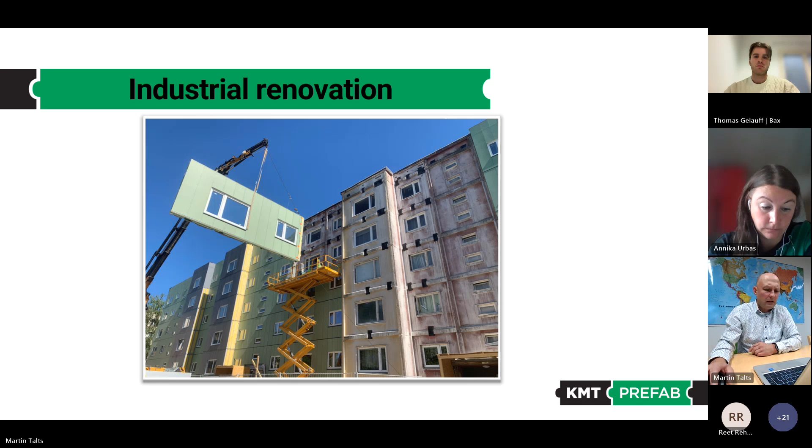About Estonian experience with industrial renovation, it started in 2017 when student accommodation of Tallinn Technical University was renovated with prefabricated wooden elements, in very tight cooperation with scientists from Tallinn Technical University. And after that, one a bit smaller 3-story building close to Tallinn was renovated in a similar way.

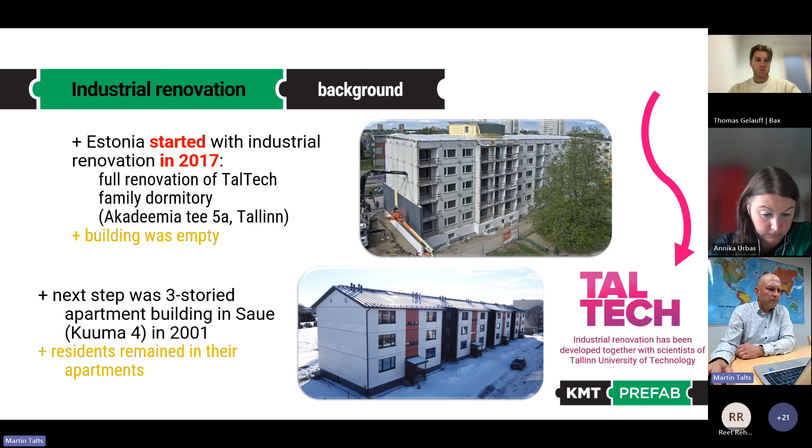And just a second. Yeah. Okay. And then

In 2022, we started in Estonia with a pilot project where 19 Soviet-era apartment buildings were renovated with prefabricated elements, and it was also supported by the EU and Estonian government. And there were chosen 5 different types of the most common apartment buildings. And today, all of them are completely renovated, and we can say that it was definitely a success story. And we learned quite a lot during this process.

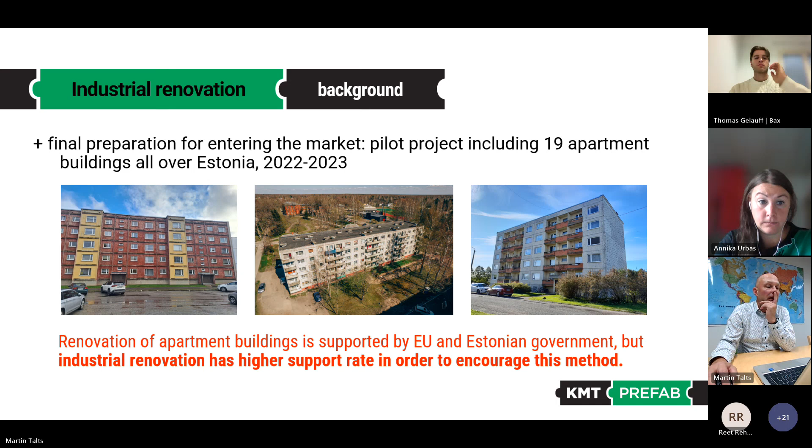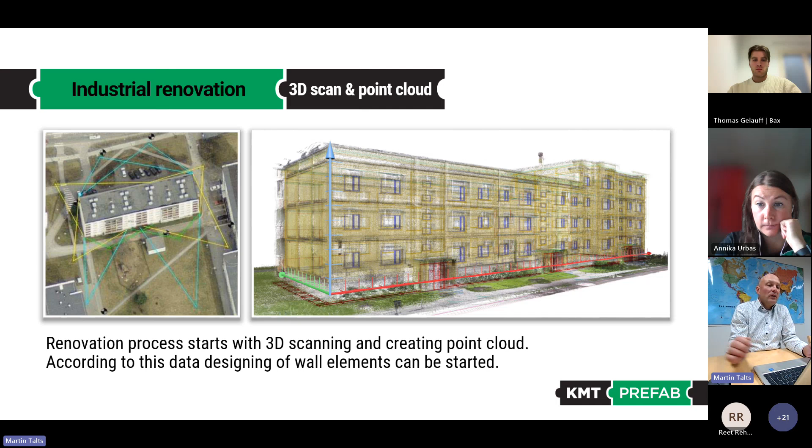Here we can see in more detail how it works. For every single project and house, it starts with laser scanning of the existing building, and a point cloud is created, and according to this data, we can design wall elements. It will then be divided into panels, and with this laser scanning, we can figure out the exact locations of windows.

We quite often face rather bad construction quality of these houses, and the main challenges are actually to find a proper and adequate fixing method and to line up windows, because they're not aligned. It's quite different compared to new buildings.

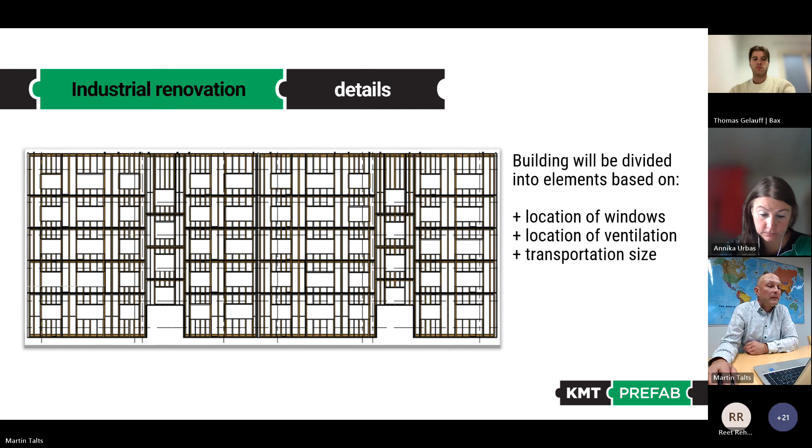For all those 19 houses in Estonia, ventilation pipes were also integrated into the elements. The requirement was that for every house, not only the facade but also ventilation with heat recovery had to be added. Also the roofs were insulated, and also the heating system and staircases as well. And in some of those houses, apartment doors were also replaced.

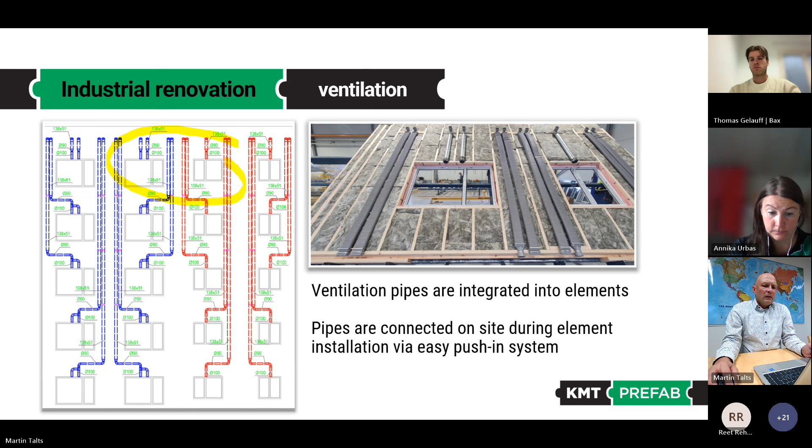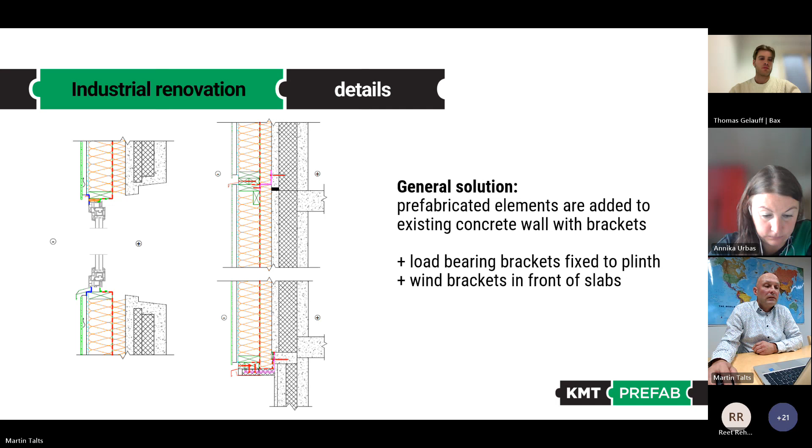So, and of course, the main advantage of every project where prefabricated elements are used is the time we can save during the whole construction process. I would say it's many times faster to insulate the whole envelope of the house with prefabricated elements. It takes only a few weeks to cover one 5-story building with 60 apartments with elements. According to our experience, it takes some 15 to 20 days, and the outside is completely ready.

And of course, using that method, there is no need to move people out of their apartments. It means there is much less disturbance during the process, and no scaffolding is needed.

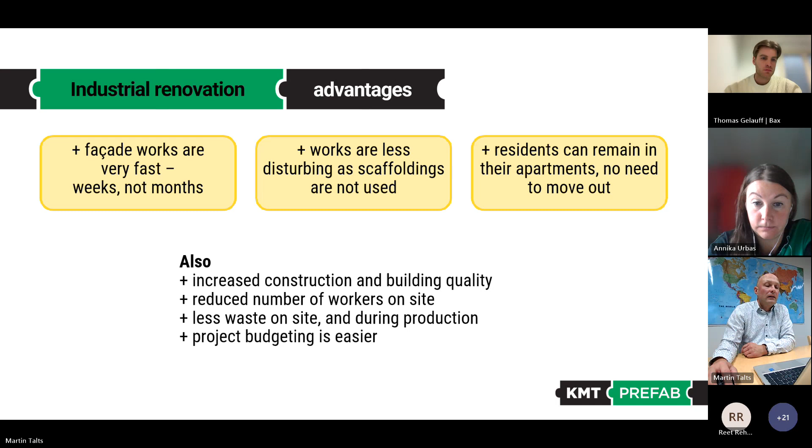And of course, one big advantage is that it's possible to install the elements in almost every weather condition, even in cold winter time. Yeah, actually it took, of course, a bit more than 20 seconds. It took about 20 days, but it's still many times faster than the conventional way.

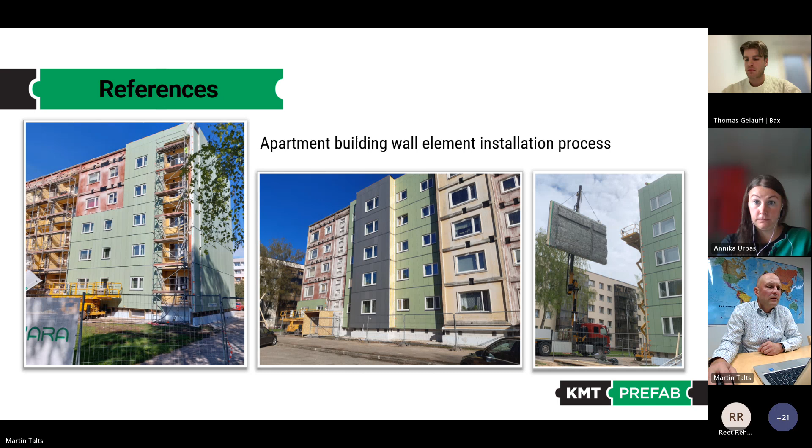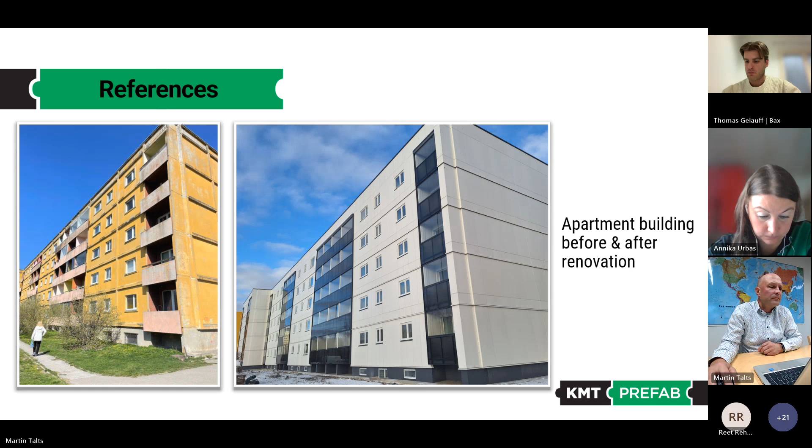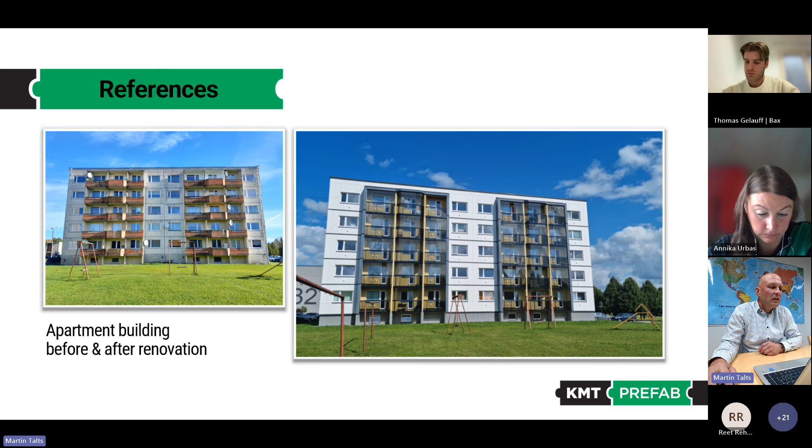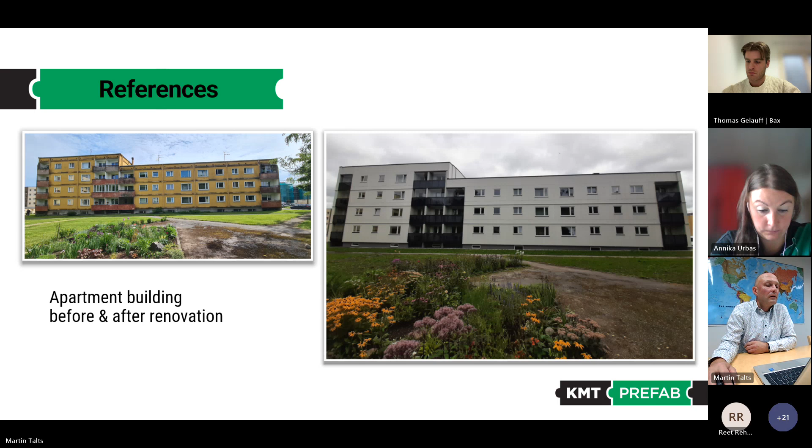And here are some before and after pictures. This is a 30-apartment, 5-story building in Middle Estonia. All the renovation with our products took only about 10 days on that project. There is another typical apartment building in South Estonia, close to Tartu.

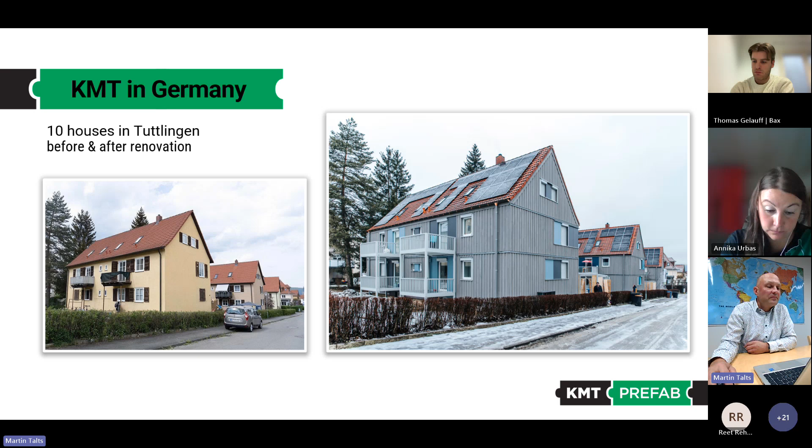And here are some of our references in southern Germany, in Tuttlingen, where we renovated 10 smaller apartment houses last year. Yeah, that was it actually from my side.

And to summarize, I would say that prefabricated or industrial renovation is actually the only way to achieve our climate goals. Because if we continued in the traditional way with scaffoldings and doing everything on site, it would take more than 100 years.

But as we know, we should dramatically reduce our emissions in the next couple of decades, and we just don't have time for using other methods, and we have to be innovative and use industrialized and more standardized methods. Thank you.

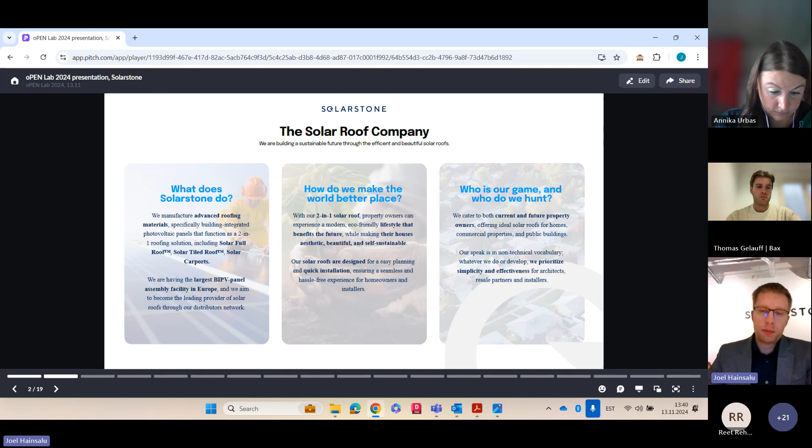How do we make the world a better place? We do it by repurposing existing areas. Whether they're roofs or, in some cases, areas like parking spaces, we can repurpose them and give them more, using already used-up materials or areas. Our main contacts are current and future property owners, and everybody related to the process of building a new house, for example architects, resale partners, installers, roofers, prefab manufacturers, and so on.

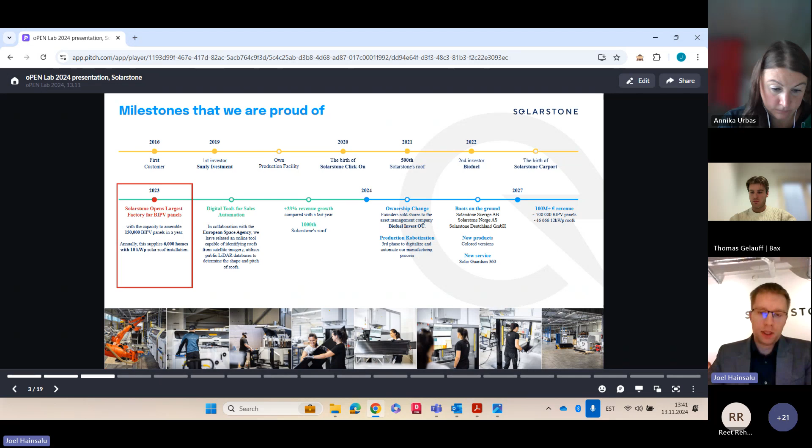All through these years we have done research and development, new products, and also installed solar roofs. In 2021, we had our 500th roof installed. In 2023, we had our thousandth roof. And we intend to grow. Currently we're active in Estonia and also in the Nordics, Sweden and Norway as well. And now we are also planning to expand into Central Europe.

So what are we fixing? What's the problem for us? We see that the traditional way of installing solar can be more efficient. The traditional way is a bit unattractive. It undermines the architectural design of the house. It has an increased environmental footprint, meaning we have several layers on the roof. It could also mean increased project management workload, because several different contractors work on site, and everybody knows that this could be a headache. It can also damage the current roofing material and add significant weight to the building construction.

And what is our solution? Adding the panel straight to the battens. Skip the middle part, so that we have aesthetic looks and fewer sections where damage could happen. So here is the regular solution, right? We have roofing, mounting systems, and rooftop PV panels. Here we skip the roofing material part by having it all 2-in-1.

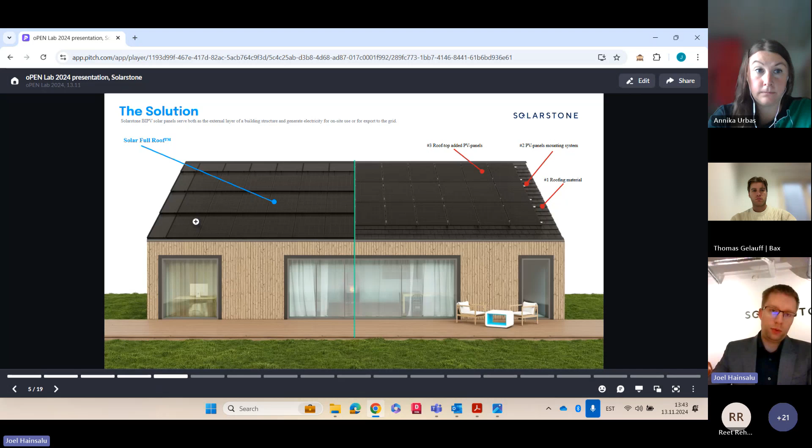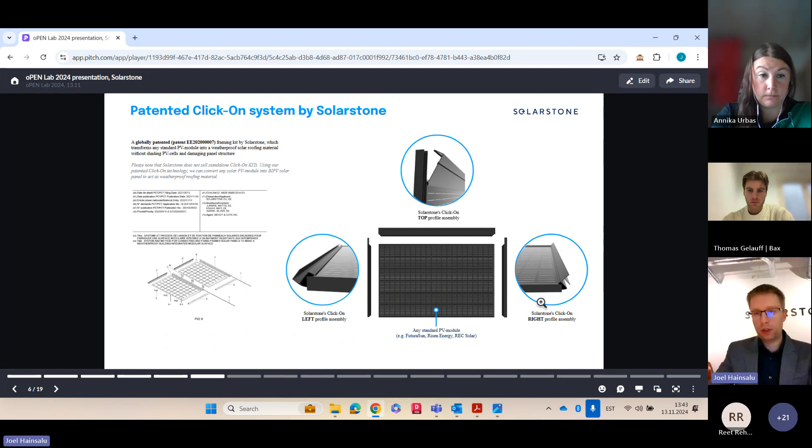How it works is that we take a standard PV module, which can be used anywhere. We make it a roofing material, but the same PV modules can be used on the ground or on a regular rooftop, or like here, as building-applied photovoltaics. We add our patented system, which we call the click-ons, and by that we make it a roofing material. When we have several modules, we can tie them together, and also tie them into the battens.

So here is how it looks in a nutshell. This is a regular section of a roof. We have battens and counter battens, and with clamps and the click-on system, we can tie these panels straight to the battens. They overlap each other, and by that we make it a nice looking roof.

Also, the ventilation is part of the design. When the BIPV industry started, ventilation was a huge question, because when solar panels heat up, they're not as efficient anymore. But by having a ventilation system throughout the side of the roof, we don't have these issues anymore. The panel effectiveness is pretty much as good as it can be, because we're utilizing existing solar panels produced by manufacturers who are best at their job, and we're able to keep them cooled so they can work efficiently.

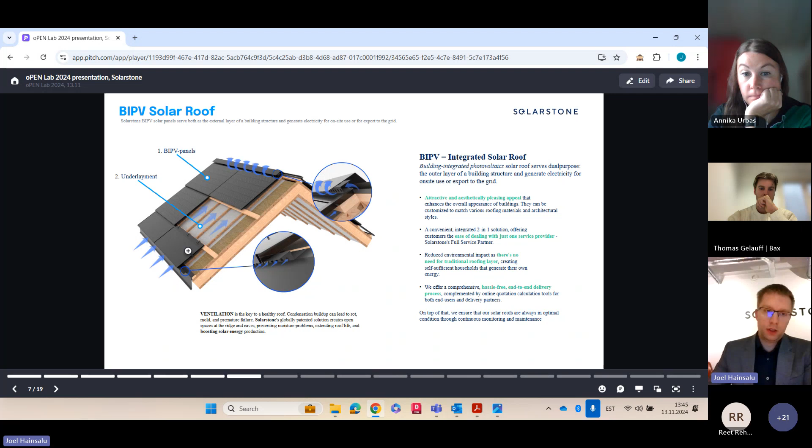This same section works pretty much the same way on a 90-degree angle, meaning it can also be installed vertically, because this is what we did with our Open Lab project last year. On the 10th of February, we went to the KMT Prefab and installed 2 PV panels together with flashings to the test rack or test elements.

This was also to test something. We all know that the panels themselves handle transportation questions really well—some panels start their journey across the globe, but travel safely, palletized and strapped. But now we wanted to test whether we could install these panels to the element already, and then have them transported as part of a structure to the site and installed there. We wanted to see if this extra handling and transportation, maybe in a different way than they're used to, could negatively impact the panel in any way. That was our main question regarding this test.

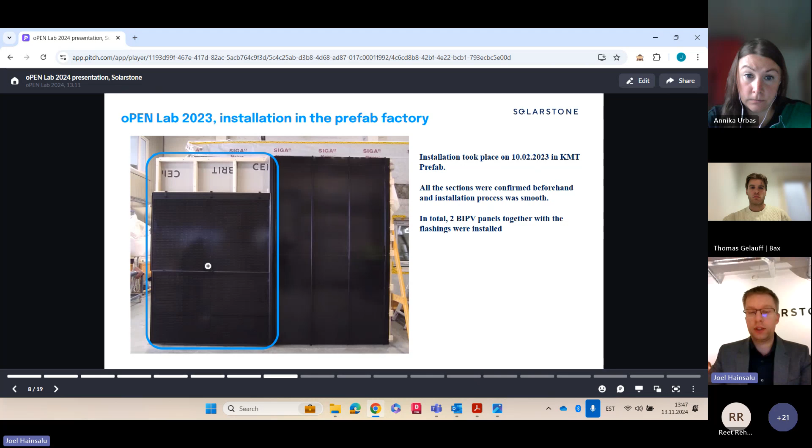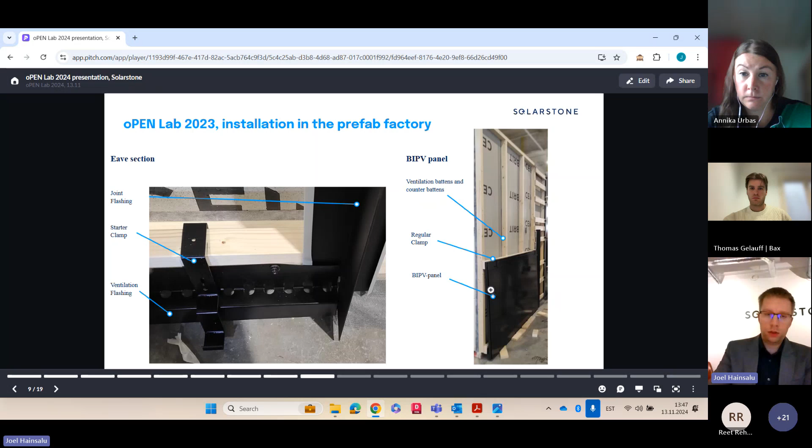Here we can quickly see how the installation took place. We had the counter battens installed, and then added first row clamps, ventilation, and joint flashing to have another solution as well. Overall the installation was really smooth—we talked through all of the sections beforehand together with KMT, and there were no surprises on site. Everything was really smooth and easy.

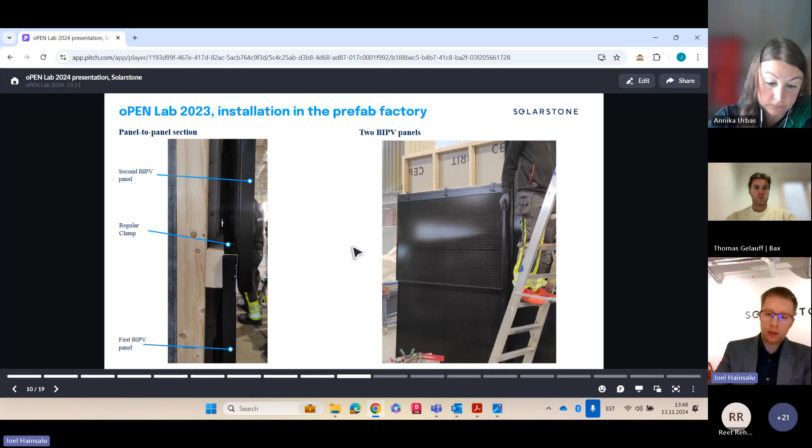Here we added the second panel with regular clamps as well, and here we can see a bit of a section. We have the first panel here, and our click-on framing—this overlap is click-on framed to the panel here—and by this it's a roofing material, or in this case, a wall material.

Also, Taltech had sensors for temperature and moisture sensitivity, so that we would have data points for roughly a year. In summer 2024, the test subject was taken down—so what were the key takeaways?

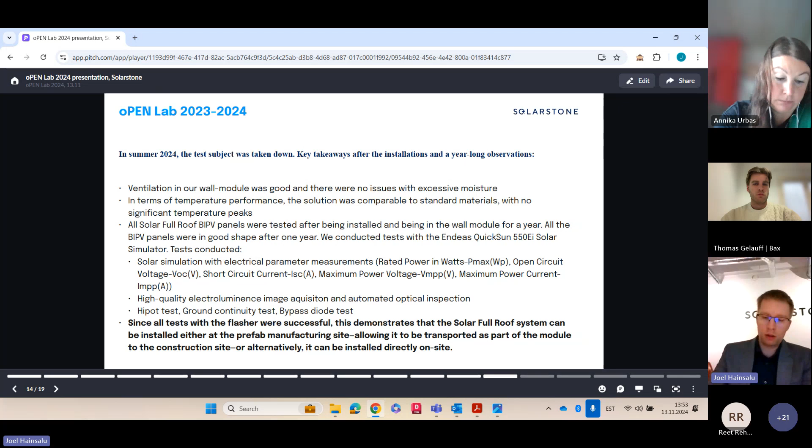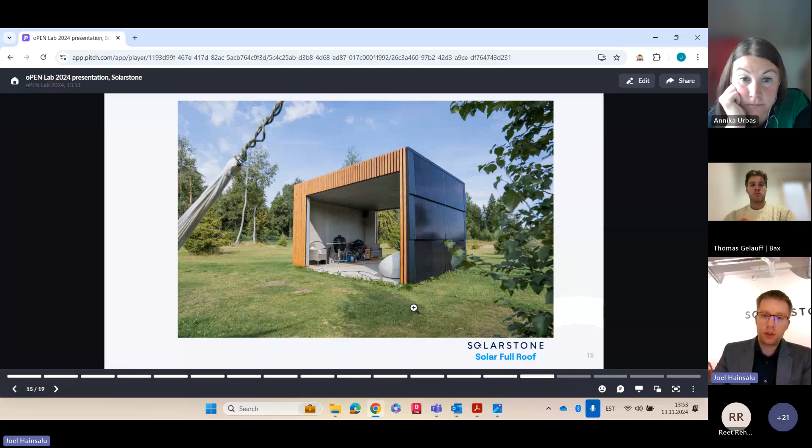Here we have some pictures of the solution when we attached it to the wall. These are not related to this specific project, but overall, we're able to install this solution on walls quite successfully.

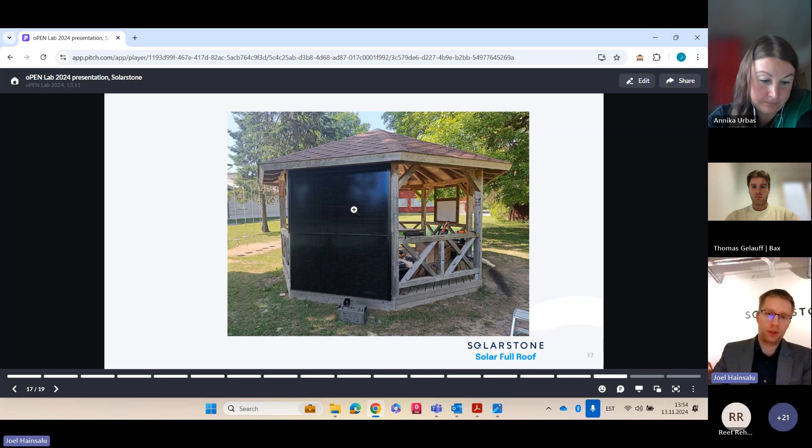This was a project we made together with KMT Middle School in Viljandimaa, in southern parts of Estonia. Here we made them a solar power station, meaning they can charge their electric scooters and mobile phones during big breaks. We also installed the same product into a logistics center.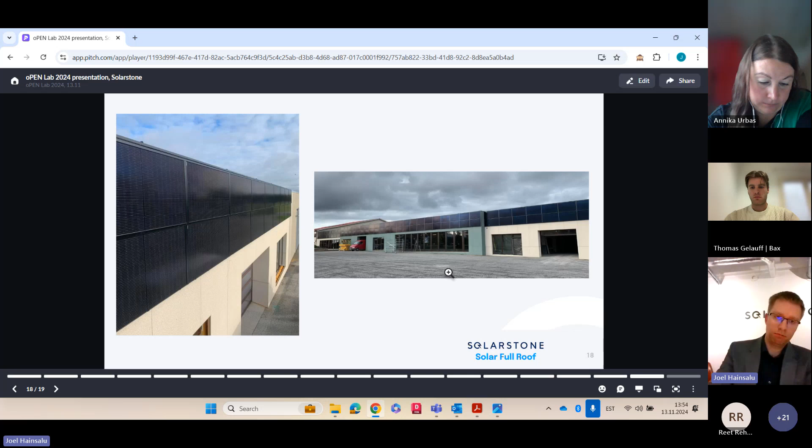So, yeah, this was roughly it. Do you have any questions?

Thanks a lot, Joel. I was wondering, specifically in Estonia, of course with long winters, how these vertical panels perform, because I think that's one of the reasons you install them this way. How does it compare to rooftop installations, and what does it do to energy usage or decreasing energy of buildings?

Overall, as we know, Estonia is quite Nordic in terms of how much sunlight we're getting throughout the year. By installing the panels on the wall, we're able to utilize the fact that panels need the sun to be perpendicular to them, and by that we're able to utilize the winter and the sun being so low. So we're able to produce more during the low sun months like November, December, January. We're able to utilize it more. I wouldn't say we'd get as much as from the sun as in June or May, which are the highest producing months, but still we're able to get something.

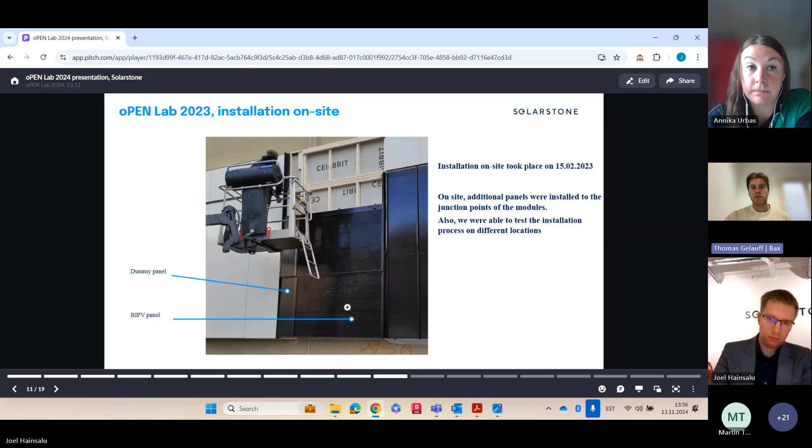All right, yeah, that makes sense indeed, specifically for your locality, and most likely also your neighboring countries. Absolutely.

Also, I would like to add that usually solar installers want to have a big empty space where we don't have windows or anything restricting us, right? These kinds of walls are really nice because we have an empty canvas, so we can put panels there and quite efficiently fill them up, meaning we don't lose power due to having to build around something.

We don't have to do the installation ourselves. We can train the crews inside the factories so that they can do it. Also, it's possible to make the electrical part and electrical connections inside the prefab manufacturing site, meaning that when the modules are installed on site, you don't need an electrician making all of the connections, because we can do them already beforehand in the factory.

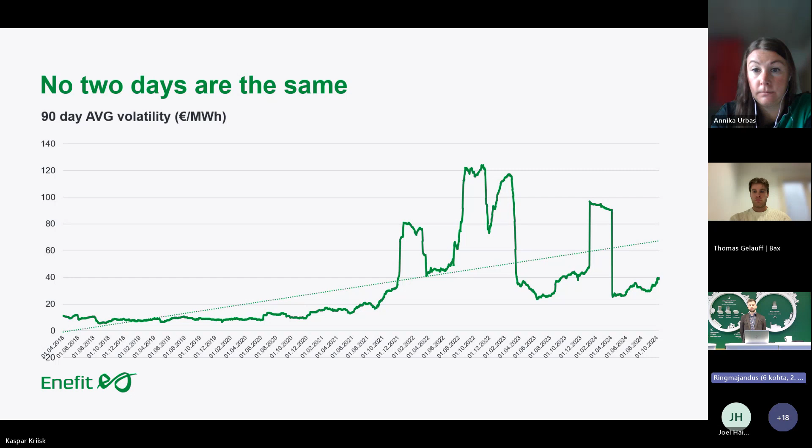And the volatility is affecting more and more those people, companies, and apartment buildings that cannot really affect the way they are consuming electricity. Usually, if we look at the average daily high and low prices, the ones that cannot affect their consumption behaviors are the ones paying the high prices. The ones paying the low prices are the companies and people who can alter their consumption habits based on electricity prices.

Whether they can do something manually, like set a timer on their dishwasher to wash dishes at nighttime when prices are cheaper, or use automated solutions to control devices that consume a lot of electricity, such as EV chargers, heating systems, cooling systems, things like that.

If we look at this graph further, we see that the spread between the average high and average low is constantly increasing as well. This means that just looking at the average prices I presented in the first slide - the average that's often seen in the media - usually isn't the average for the regular consumer. The regular consumer's average price, most often than not, is higher than the market average.

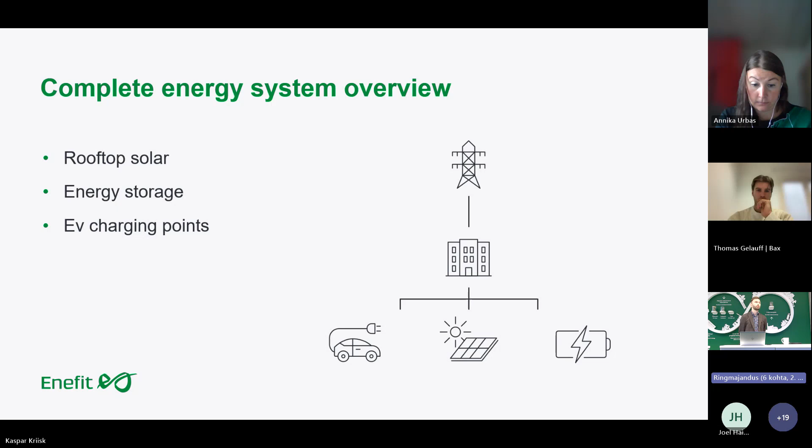And while I agree with this image on a high level, there are some intricacies in the Estonian legislation and market that we need to really focus on to understand the challenges of achieving all of this, what we want to achieve with these solutions, to really minimize our impact on the environment and also to minimize our cost of electricity. And this comes from two different settlement ways that all of our apartment buildings in Estonia are using today. All of those are using either one or the other.

This information is forwarded to the electricity seller. They will bill you accordingly. Every apartment has freedom of choice in selecting their DSO tariff. Every apartment has freedom of choice on selecting the company they purchase electricity from and the package that they purchase electricity from.

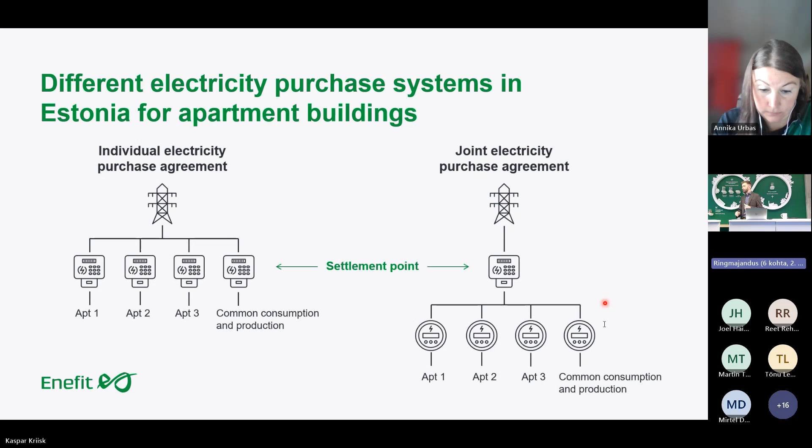So the apartment building will handle the billing internally based on these measurements, and the apartment building association will purchase electricity based on this settlement point. And all of the common consumption and production is separated just like with the previous example.

Now looking at those two different electricity purchase agreements separately, we can look at the pros and cons because there's both pros and cons for both systems. The one which is used the most in Estonia, the individual ones, has a lot of pros. The main one being that it's really simple and easy. Everybody has their own metering point, everybody has their own contract. The billing is automated already between the grid operator and the electricity seller. It is really, really simple to do.

Also, the apartment owners have the freedom of choice between who they are purchasing the electricity from, and also which package are they using? Are they using a fixed package or Nord Pool package or something else? They have the freedom of choice of doing it simply just by doing it themselves online.

But a really, really big drawback for this system is that the solar park and the battery, and usually even EV chargers, are installed under this meter. And this means that if the solar park is producing energy and the apartment is consuming electricity at the same time, then the apartment cannot consume the energy generated by solar directly, because the energy generated by solar is going through this energy meter and going through this energy meter.

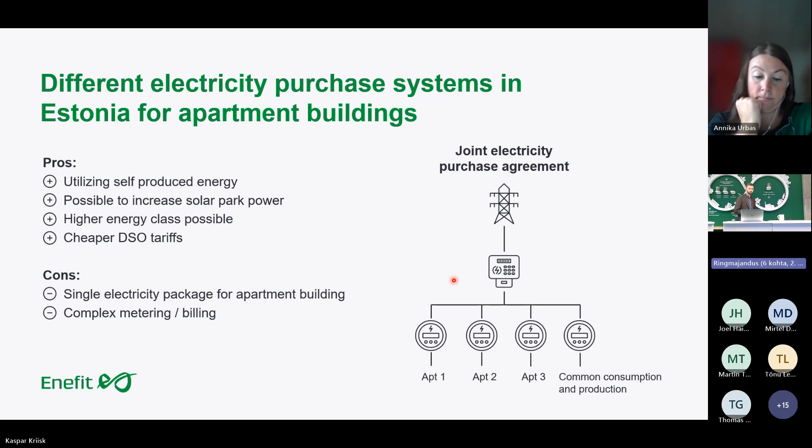So what I define as a complete electricity system for an apartment building is not only that we have a solar park, not only that we have a battery and EV chargers, but also that we have a system in place that can manage those assets together. This means that a joint electricity purchase agreement is required to do so.

Furthermore, in order to really save on electricity costs, we need a centralized system that controls all of those assets together, because oftentimes solar and battery can be used together. There are some softwares out there, but there aren't that many solutions available that can manage EV charging, solar park controls, and battery controls all in one place.

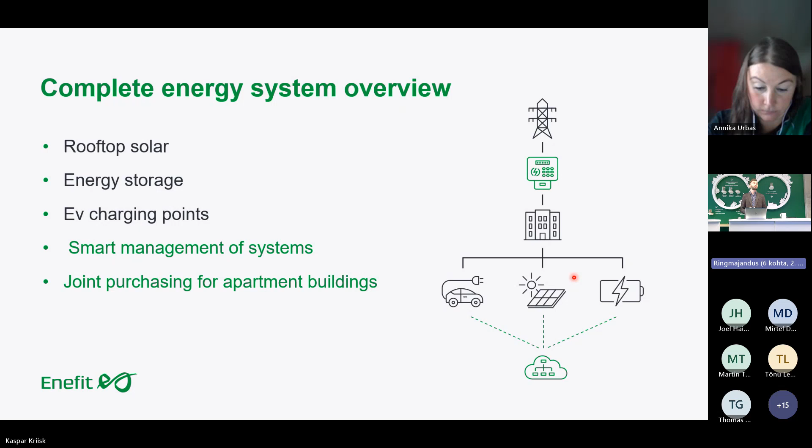It's just a brand new industry. A lot of companies are working on it, ourselves included. There are few available solutions ready today on the market, but I know a lot of companies are working on it. Having control over your devices means you have control over your electricity costs.

Because if we are having joint metering in an apartment building, and controlling all of those devices together, this means we can shift the entire load of the battery, the EV charger, the apartment building to hours where the electricity is the cheapest. So the apartment building is protected against peak electricity prices, which I mentioned before — when you have no control over your devices, most often than not, you are paying peak prices.

But if you have control over your devices, you're able to shift it to hours where it's more cost friendly for you. With the battery solution, depending on the technical setup, there are backup power opportunities as well. Managing all of those things together enables apartment associations to have control over their costs, and through incentivizing that, we are minimizing environmental impact as well.

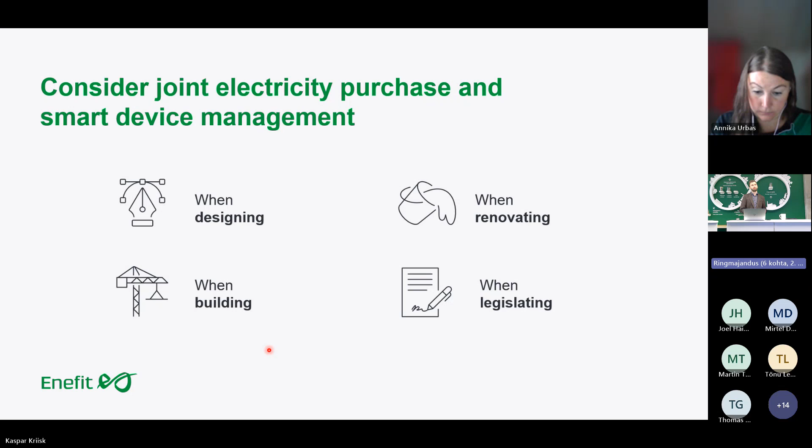That's everything from my side. I hope I wasn't too technical, which I tend to be in my presentations. But if there are any questions, I'd be glad to answer them.

Thanks a lot, Kaspar. I was wondering, as we see a lot with renovation approaches in Tartu and the wider region, of course, energy prices surged in 2021, and there's some leftover effects. They seem, and also from your graph, to have rebounded to pre-COVID levels or pre-Russian war levels, relatively. How does it impact the value proposition of most of the services you are now offering, as we see that this is really a disincentive for deep energy renovations?

I would like to make one correction: even though the average prices are coming down, the volatility has rebounded up. So the price difference between the days has rebounded, but still, the prices, even though not compared to the peak prices, are almost doubled when comparing to pre-energy crisis levels.